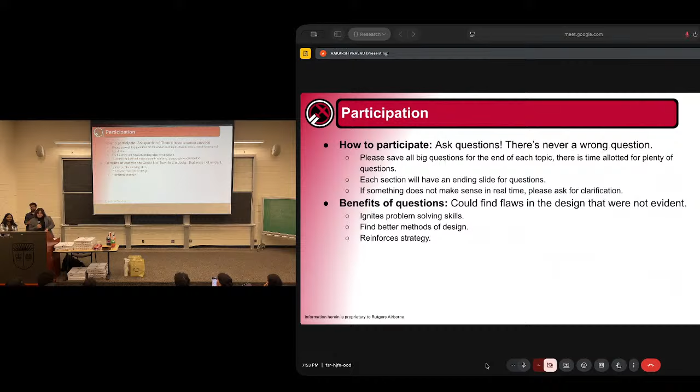Explain the actual organization as a whole. Hello, so if you guys don't know me, my name is Mahadi, and I'm gonna go over how our team is organized, and then a bit about the documentation.

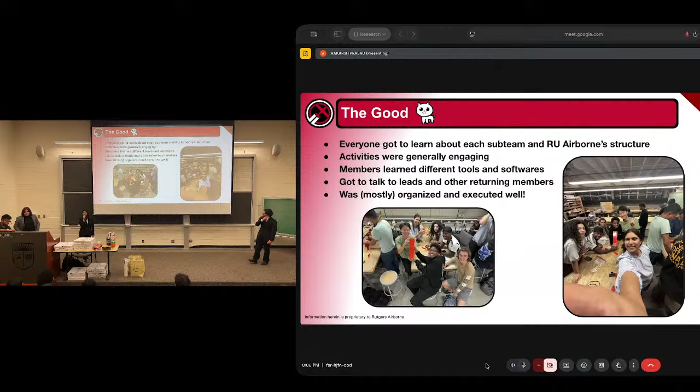And it was really nice to talk to all the leads, as well as new and current members. And it was mostly organized, and we're going to talk a bit more about that when we get to the improvements. So, some things that could be improved upon, or some things that are bad...

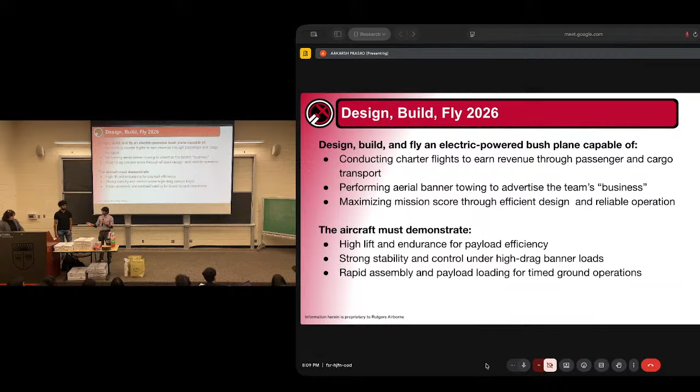So some general mission requirements: this year something newish that's been added is a rated aircraft cost, which is a variable dependent on wingspan, and it basically sets a maximum wingspan of 5 feet, but also sets a minimum wingspan of around 3 foot to maximize the score. And the score affects mainly the mission scoring and is vital to that mission scoring.

And then on top of that, we have the ground mission, which is the assembly and the ground demonstration. You have mission 1, which is no payload and basically a flight test. You have mission 2, which is the passenger and cargo mission, and mission 3, which is the banner towing mission. So to go more into specifics about each mission, let's have Joel start off.

So it all starts with the ground mission, which is basically an analysis or a test of how fast you can get your plane configured and ready for flight. So the ground mission takes place in, am I blocking the screen? The ground mission takes place in a 10-foot by 10-foot box. We'll call it the mission box.

And on the edge of this box, there's a start-finish line, because the ground crew member, who is the person configuring the plane, will be starting outside of the box, and then configuring the aircraft inside of the box. So before the timer starts, the pilot will be verifying the flight control surfaces just to make sure they're all active and working. Then the ground mission judge will start the timer.

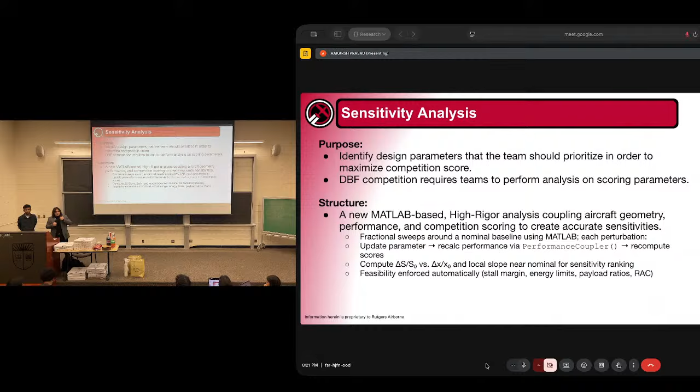So we take all that and iterate upon it multiple times until we have an actual diagram to explain to us engineers what we want to design around and how we want to design it. So what are we assuming and what are we figuring out?

Well, after analyzing and taking a lot of your input, so thank you to all of you who worked on sensitivity analysis and for your wonderful code, we were able to figure out, okay, we want to assume certain parts are constant. Let's say we assume we're at cruise velocity, or at a certain point we're turning, or at a certain point we're inclined.

You take all those concepts, and then you vary each of the little parts of those performance equations. Battery capacity is the toughest one, which propulsion was able to crack, so proud of you guys for that one. Bank angle, which determines basically how small a turn can we physically take. Do we want to take a nice, long, gentle turn, or do we want to take a nice, fast, quick turn? Which you guys might have an intuition on, and that intuition will be proven mathematically.

Then we also have wing area. How much lifting area do we want? Do we want to maximize lifting area? But if you have a lot of lifting area, a lot of wing, you may have a lot of induced drag, or some other caveats attached to that. Then you have wingspan. Wingspan matters this year in the sense that we can't just maximize it; our score is attached to minimizing it. If you minimize the wingspan, you will in theory get more score. We'll prove that mathematically as well.

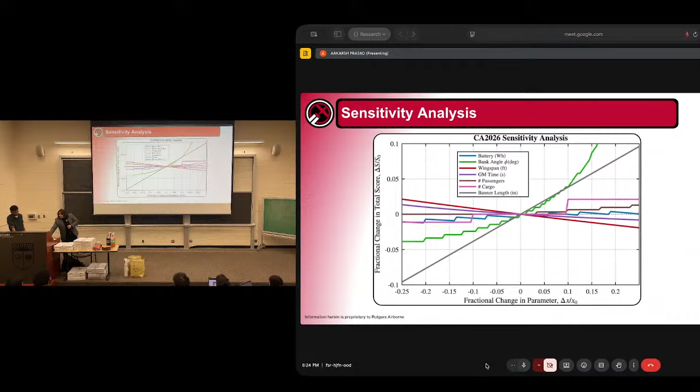So, what are the primary conclusions? Make a hell of a long banner is one of them. The second one is make a super maneuverable aircraft, more maneuverable than you've ever designed before. Try to minimize the wingspan. How do you minimize a wingspan and make it more maneuverable without introducing very unstable effects for the vehicle? How about cargo? You're going to increase it so much, you have to tow a ton of cargo.

And remember, there's a ratio where you need at minimum 3 passengers per cargo. So if you have a lot of cargo, you're going to have 3 times as many passengers minimally. So all those things now tell us, along with trying to put the cargo and passengers in on the ground, we should try to assemble it into the vehicle.

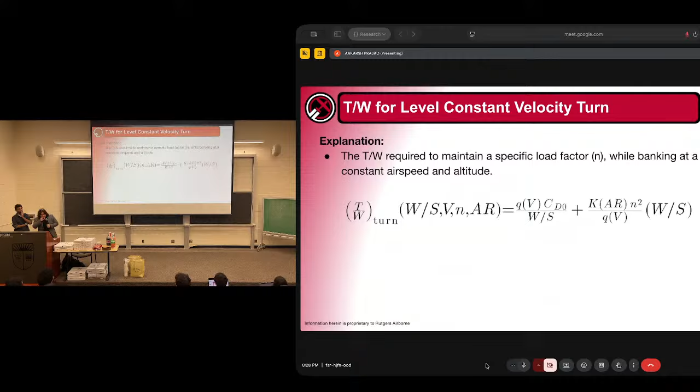The acceleration inward that causes an object to go into rotation. So if you have a high enough load factor, which means a high enough bank angle, you can relate it to the wing loading and different parts of the aircraft, such as the actual velocity of the vehicle, the drag of the vehicle, and other parts like the dynamic pressure and the aspect ratio. So you can create a relationship for the actual load factor while banking and turning the vehicle.

But it made it easier to fly, a little bit easier. It allowed us to be able to control the vehicle much more smoothly in flight and figure out how we want to go about actually optimizing the mission. So that's an important constraint. How easy is it to fly?

Then you have the thrust to weight ratio for a desired cruise speed, which is almost exactly like the load factor version, except without the n squared. And we can talk about the aerodynamics of why that is, but I won't go too deeply into that. Just know that this relationship relates the wing loading directly to thrust to weight, and through that to velocity.

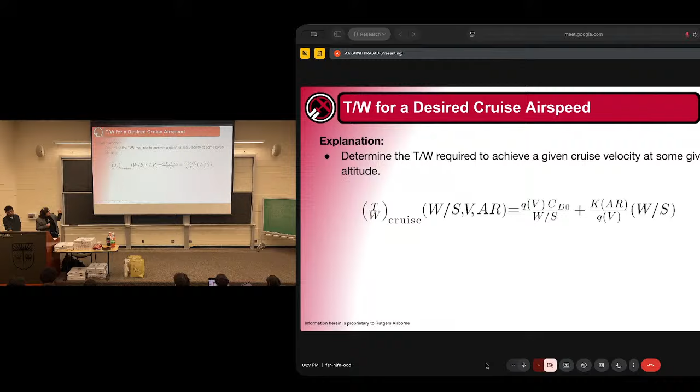So this is the part that kind of tripped me up for a bit, and still trips me up. In fact, it trips Professor DeMora up, and he's the aerodynamics guy here at Rutgers. So it trips him up, and it trips up Baru, and even Knight, and pretty much every professor. Then you know we're kind of cooked.

So how do we actually determine the big banner that's super long? We want to make it super long. How do we actually figure out what kind of effect that has on the constraint? Because obviously that has a constraint on the vehicle. So let's say this banner, or think of a flag really, like a flag on a pole. It flutters about, back and forth. What if that fluttering was like a sine wave?

So I talked to Professor DeMora, and he said, well, we could force it into a sinusoidal motion, and we'll create a relationship for that. So through a bit of math, really cool math, so for my aerodynamics people, I hope you get to experiment with this at some point in the future because I'm really excited by it. We developed a relationship that determines how much the banner will oscillate, and from that, determine the actual average drag from that banner. And when you actually put it into a graph, it looks something like this.

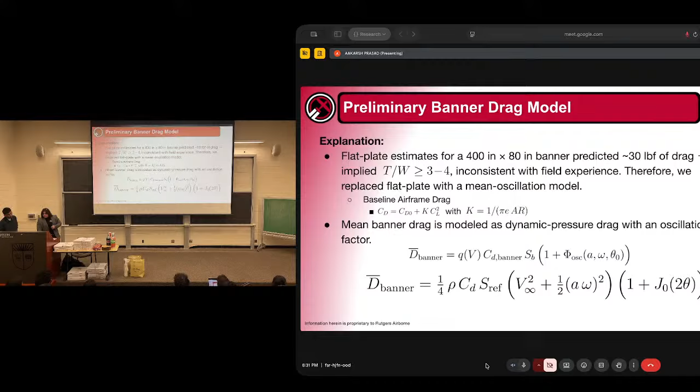Now, is it completely accurate? No. But it's better than what we call a flat plate approximation, which basically says if I took a really big old plate and put it at what we call angle of attack, or the angle between it and the air it's moving through, we'll then see that the drag looks like 30 pounds, which we know is not true because USC did it with like a 30-foot long banner, and they did not experience that much drag. So we have to create something more accurate to determine that.

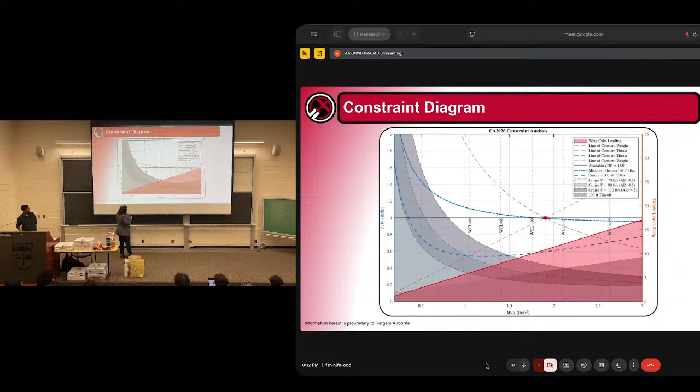So, taking those relationships, we pick a point. And this point happens to be a thrust to weight ratio of 1 to 1, a wing loading of 1.9014 pounds per foot squared, and then a wing cube loading of around 10, which is

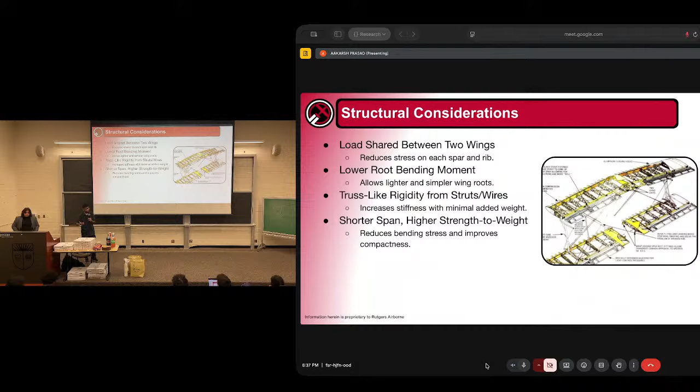So if we don't have a lot of moment, that means we won't have a lot of flutter, which I'll go into, and also structures we'll mention a bit later on. Usually for biplane wings, there are also struts, like rods connected from the top wing to the bottom wing, that help increase the structural stability of the aircraft. So aerostructures will go on there after this next slide.

All right, manufacturing considerations. This is, I'm pretty sure, the first time in airborne history that we will be manufacturing a biplane. It will have its complications, I will say. That's not something I'd say is going to come easy to us, right?

The best part of the manufacturing is that we have a bit more leeway to work with weight. The number of passengers we can add is completely up to us based on how we determine the CG of the aircraft. And we have more leeway because if we have two wings in the forward fuselage, then we can shift around the weight as much as we want.

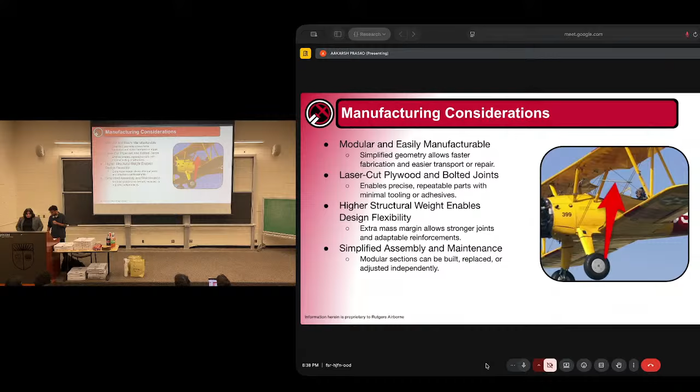Alright, next is aerodynamic consideration. This is kind of outside my specialty, but I'll try my best to explain it. From an aerodynamic perspective, the biplane helps us kind of cheat the system a bit. How does it let us cheat it though?

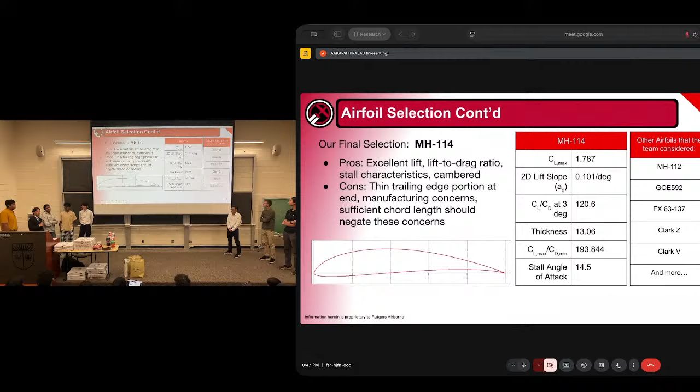Its stall characteristics, so basically how well can you rebound from a stall given that you do stall. And since it's cambered, it does produce a little bit of lift even at an angle of attack of 0 degrees, so that's good, especially when you're taking off. The only con is the trailing edge at the end, it might be too thin, however, with a long enough chord, it should be thick enough. Thickness is dependent on chord length, so the bigger your chord, the bigger your thickness.

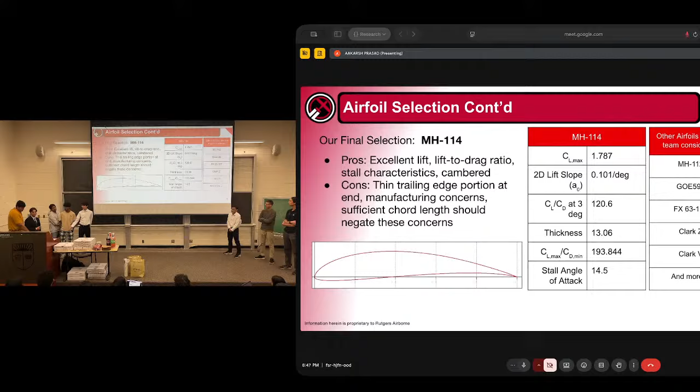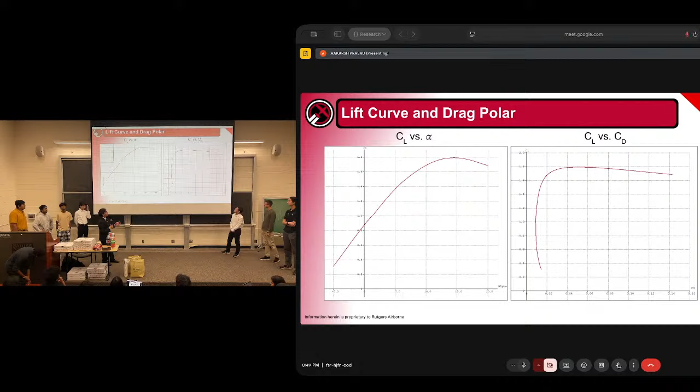Its maximum coefficient of lift is about 1.8. And the drag polar curve, that is also good. As you can see, we have really high coefficient of lift, and as you look on the x-axis, it's a fairly low coefficient of drag. Again, that's good, we want more lift, less drag. If you imagine a tangent line to that graph, you would have a slope of 0 right around the maximum coefficient of lift, and then it starts decreasing. So that kind of means that our drag forces are increasing while our lift is decreasing, which happens at our maximum angle of attack, about 14.5 degrees, which is good because we're not going to be flying at 14.5 degrees for a long time. We're mainly going to be flying around 3 degrees above the horizon.

And so as mentioned before, the aspect ratio and wing loading that we found to be optimal was 4 and 1.9. This is because of the low wingspan that we required. And because we basically know our takeoff weight is going to be 15 pounds, given that we want our aspect ratio to be 4 and wing loading to be 1.9, we're essentially locked into a pretty narrow range of what our wingspan and corresponding chord can be, which meant the amount of values we had to test was pretty limited, luckily. The analysis we used was XFLR5 with the quantitative decision matrix.

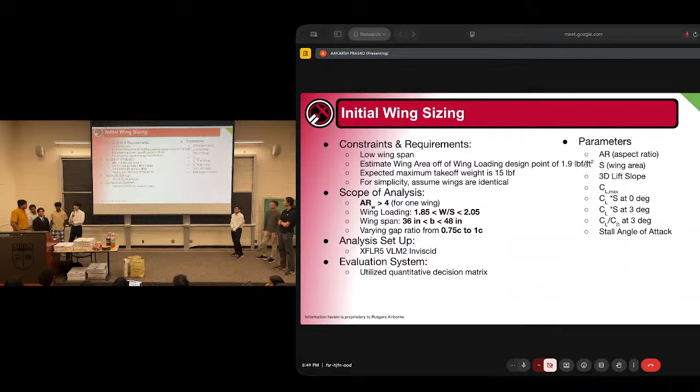And so the sizes that we found to be most optimal was an 11.9-inch cord length and a span of 48 inches, which gave us an aspect ratio of exactly 4, and a wing loading of almost exactly 1.9. And so even though our testing range for gap to chord was only 0.75 to 1, the gap to chord that was most dominant was actually smaller, at 0.625.

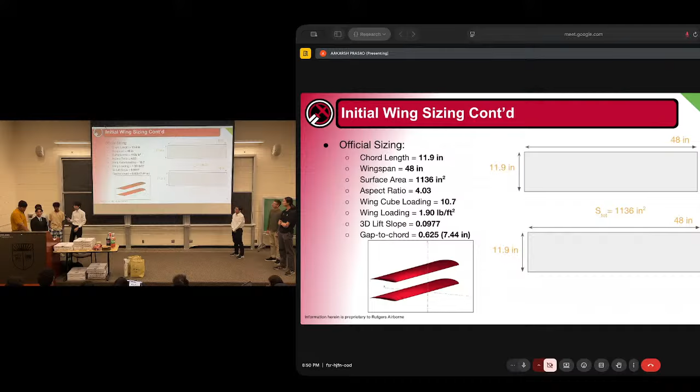So this is a wind tunnel test from NACA, showing the gap to chord ratio for a specific angle of attack, and then the stagger for angle of attack. As Federico said, we didn't really use any stagger. The lines, as you can see over here, are really close together, so there's not really much difference for the actual stall angle of attack. A higher gap to chord ratio decreases interference and improves lift.

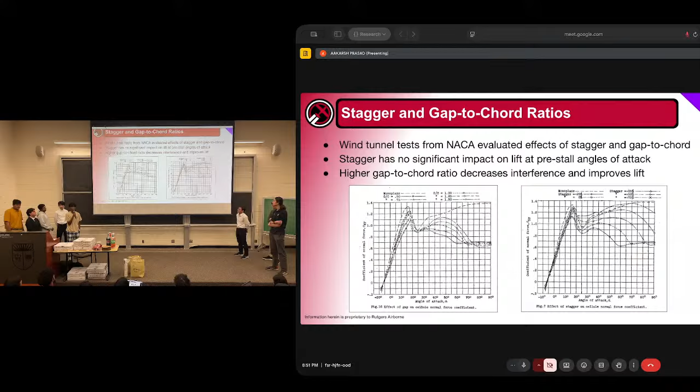One of the most important parts about the biplane design is the gap to chord ratio, which determines how much interference the wings have with each other. This is a graph I should start with Munk, the biplane goat, who introduces two efficiency factors based on either the geometric angle of attack or the camber of the airfoil. These efficiency factors give you a lift reduction or penalty. If you look at the graph, B naught, the top line, is higher, meaning it's more efficient than B, which is lower and takes more of a lift penalty. So highly cambered is good.

The gap to chord ratio, of course, we would like it to be 1 or a little bit higher than 1 to minimize the interference of the two wings so that we don't take too much of a lift penalty. But because having a high gap to chord ratio means a big fuselage, that's not good for aerostructures, so we have to compromise. We take something pretty small, a gap to chord of 62.5%, for fuselage and structure reasons. If you're interested in the exact numbers, B naught is 0.88, and B is 0.77.

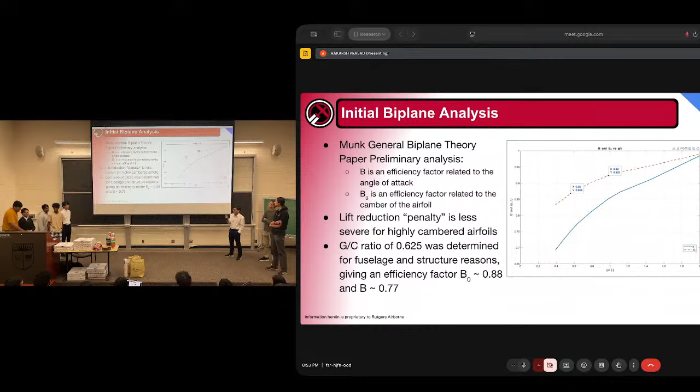When doing the initial tail sizing, a few parameters we take into account are the aspect ratio as well as the tail volume ratio. For the aspect ratio, we want it small enough to reduce the risk of a tail stall, but also big enough so it can respond to any disturbances. For the horizontal tail, we're expecting a range of 3 to 5, and for the vertical tail, an aspect ratio between 0.9 and 2.

For the tail volume ratio, the horizontal tail is about 0.4 to 0.7, and the vertical tail is 0.025 to 0.075. Using our formulas, we vary parameters such as the moment arm, the area of the horizontal or vertical tail, the wingspan of the aircraft, the geometric mean chord, and the area of the wing to get a value within the ranges we're looking for.

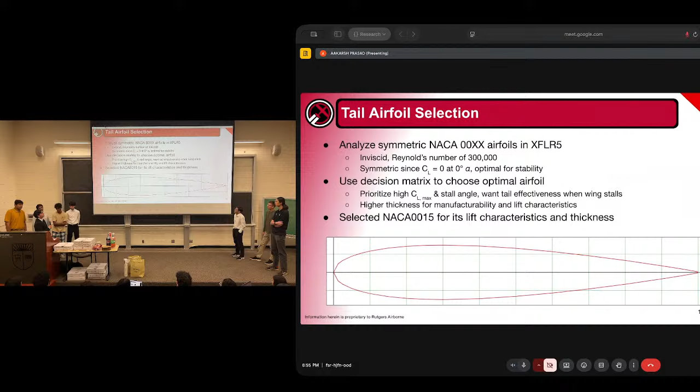The tail is at some distance from the wing, call that the moment arm. These equations are from Snorri. What they do is minimize the wetted area of the tail surfaces and fuselage, which gives us less drag, the optimal or least drag.

We got a sheet and altered the volume ratios. We expect our fuselage to have a diameter of like 8, and that's what the sheet spit out. It was different for the horizontal and vertical tail, but not by much, so for simplicity's sake, we just make them the same. That's a pretty typical thing to do.

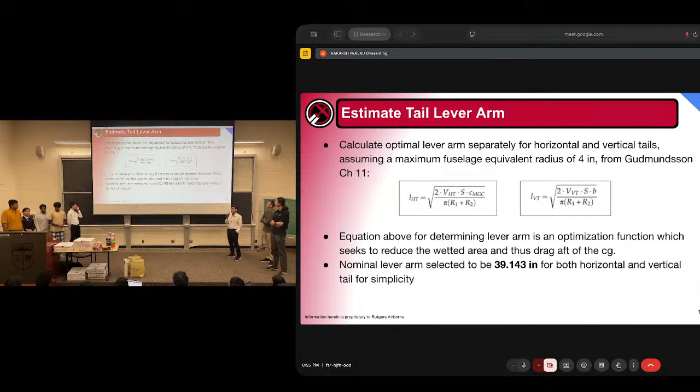With the spreadsheet that Federico made, which has a bunch of equations from Snorri like the one from the previous slide, we pick some parameters that the spreadsheet spits out, put it into XFLR5, make a plane, and estimate Cm naught, Cm alpha, and the trim angle.

After iterating through tons of values for the area, span, and chord, this is what we got: we ended up with a span of about 28 inches, a chord of about 7 inches, and an area of about 200 inches squared.

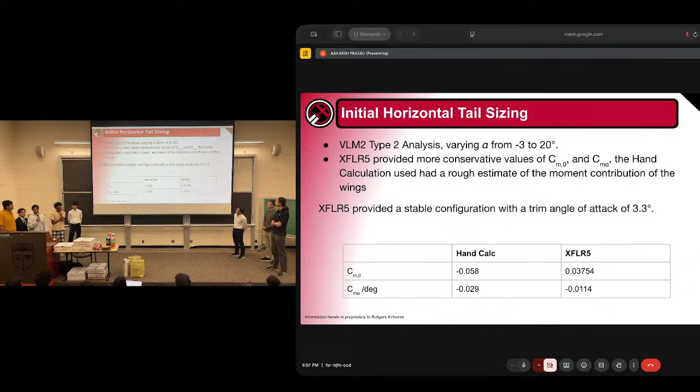Alright, this is the fun one. So we're flying a banner, so if there are crosswinds on the banner, that's going to make a lot of unfavorable yaw moments. So we do need a very good vertical tail. It is the utmost priority of the aircraft, in my opinion, a very strong opinion.

And the criteria for that is we want the yaw moment derivative, or the slope with respect to beta, to be greater than 0, and the roll moment with respect to beta to be less than 0. And that is the criteria for lateral stability.

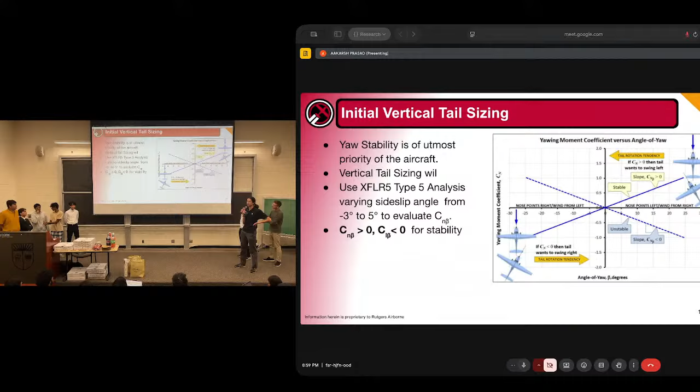values. So you see the table, that one is less than the hand calculation. And our final dimensions for the vertical tail: we found an aspect ratio of 1.9, an area of 95 inches squared, and a tail volume ratio on the higher end of 0.068. And I also calculated the roll derivative with respect to beta; it's much smaller than the yaw derivative.

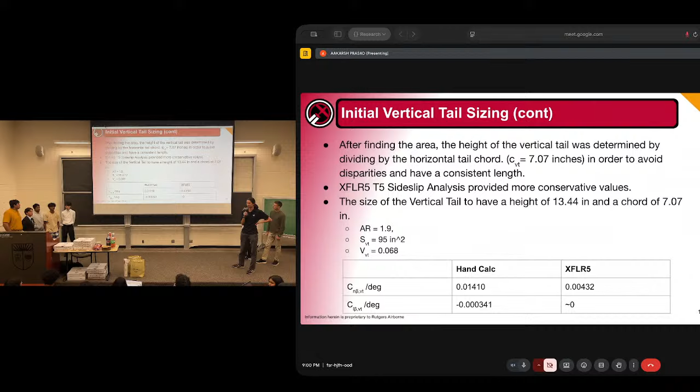All right, so the destabilizing parts of the yaw moments come from the wing and the fuselage. It is given by that equation there. You have to go to a lot of graphs to try to get a value, and the calculated one that we got was on the order of 10 to the negative 4. So this is 2 orders of magnitude less than the Cn beta that our vertical tail provides, which says it's stable. I hope it's going to be stable.

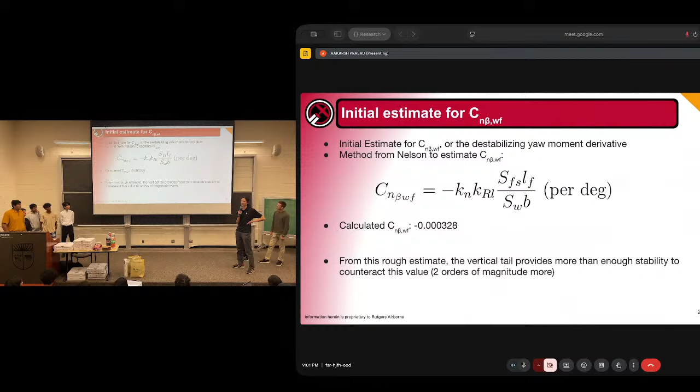And for the flaps, we also made them the same size, and they will be used on the inner portion of the wing from 20% to 50% of the half wingspan.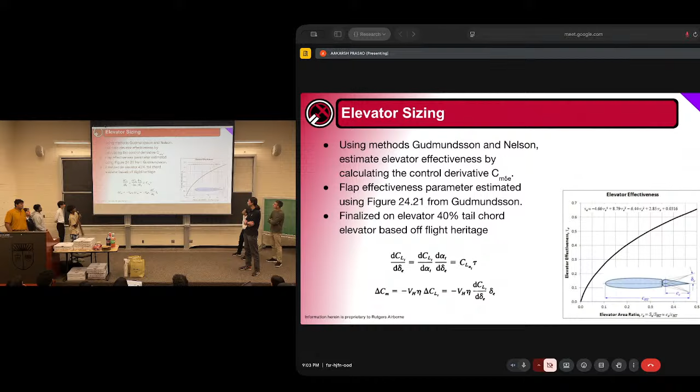So for elevator sizing, we used the Gudmundsson and Nelson methods to estimate the elevator effectiveness, and we got the control derivative. From the figure over there, we got a flap effectiveness parameter, and we decided on a 40% tail chord elevator based off our previous flights. The graph shows the elevator effectiveness for the elevator area ratio. So the elevator effectiveness that we chose was 40%, which is 0.4, respectively 0.2 for the elevator area ratio.

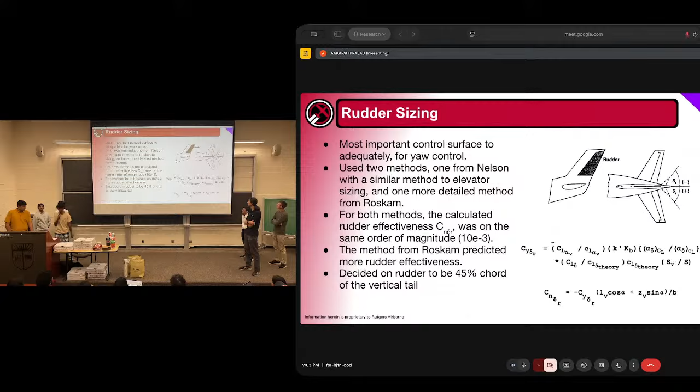For yaw, for aileron, you can calculate adverse yaw, and we found it to be much less. It's less than the yaw moment when you deflect your rudder 10 degrees. Adverse yaw is when you deflect your ailerons, you get unfavorable yaw.

And now for pitch, only the elevator. When you deflect your elevator, that changes only pitch, and you have a delta CM of much larger value than what you get if you deflect your lateral control surfaces.

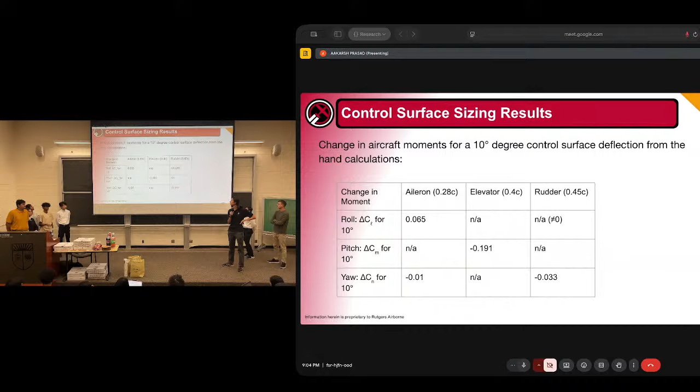So some future projects we're having: we're gonna investigate maybe having a taper ratio or just not a perfectly rectangular planform for better wing. We want to delve further into the biplane configuration, and this may include redesigning or resizing. It depends on how well we fly and how well the first prototype goes. We're going to determine our CG envelope and mass properties once that gets determined.

We're going to start AVL, which is, in my opinion, a more sophisticated software, and an even more sophisticated in-house software that we have is CFDS, made by Anastasia and Sharish. We hope to use that as well in the future when we are analyzing the flight dynamics of the aircraft.

All right, questions? Yeah. When we were at the NEAT fair, we saw various tail configurations where the rudder was the biggest surface of the aircraft, and most of the V-stab was a rudder. Did you guys do any analyses on that? And what were your thoughts?

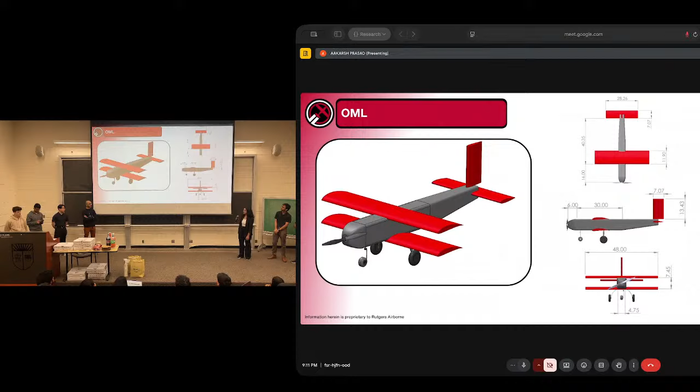Yeah, so for the aircraft, as stated before, we're using the airfoil MH114, which will have a span of 48 inches and a chord of 11.9 inches. And we're using the biplane wing configuration, which will allow for minimization of RSC, which we know is a very important factor for scoring.

Okay, so for this year, we're going with a conventional aft fuselage as opposed to a boom tail that we've done last year. Both our H-stab and V-stab use the same airfoil, which is the NACA 0015 airfoil, and it is a symmetrical airfoil. Our horizontal tail has a span of 28.26 inches and a chord of 7.07 inches, and our vertical stabilizer has a span of 13.4 inches and the same chord of 7.07 inches.

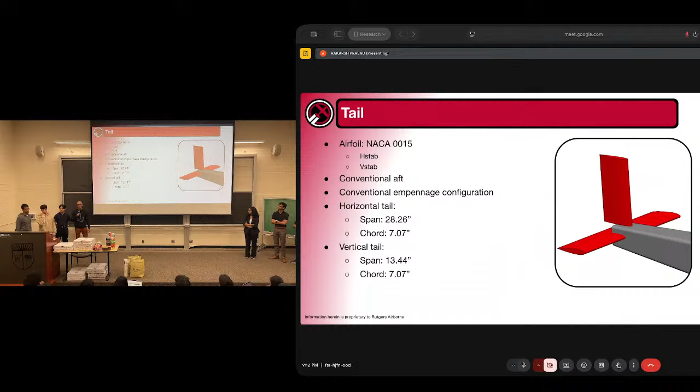So for wing to fuselage attachment, since we have a single wing at the top, we just kind of screwed it in and attached a carbon fiber spar through it to make sure nothing happens during flight. For the bottom wing, it's going to be split, so it's going to be like one of our previous airplanes, which was Susan, where we separately bolted each of them and had a carbon fiber, so it's a pretty similar design of integrating it, but it's each different.

And as Parks has mentioned, since we are doing a biplane, we also need to account for bracing. And what bracing basically does is just add stability to your plane. And this can either be in the form of solid rigid struts or also wires. Wires only act in tension, while the struts, since they are rigid, will act in both compression and tension. When a wire, quote unquote, compresses, it just bends a little bit. Yeah.

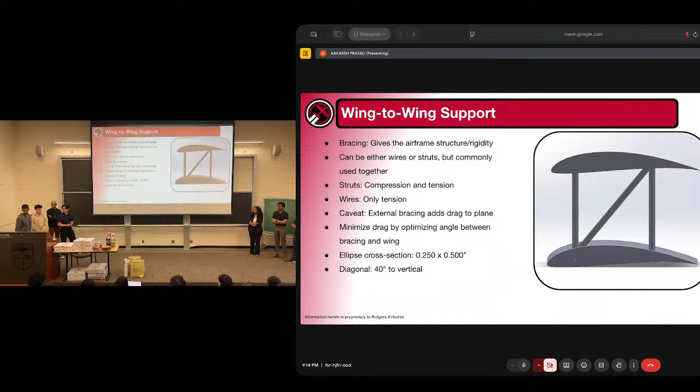Yeah. All right. Let's talk about the nose cone. First, before I go into this, I want to mention that some of these measurements are a bit tentative, and we're working on it essentially. But for now, I can tell you what we have. We're gonna 3D print this cover with, I believe, a 6.25 by 7.45 inch base, and that has a 0.75 inch corner fillet. And the propeller dimensions: it's a 20 inch by 12 inch propeller.

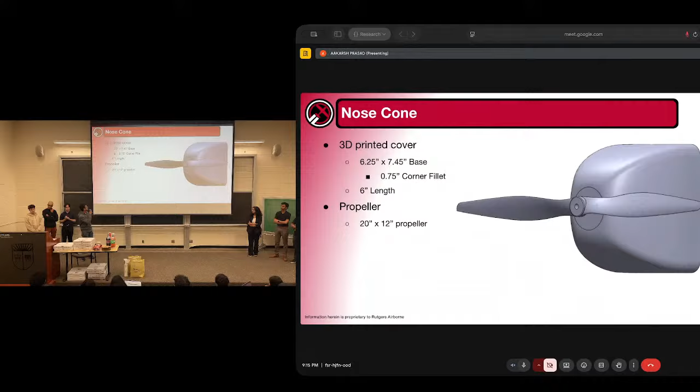So our landing gear configuration for this year is a tricycle landing gear. As you mentioned, we do have a lot of experience with that in the past, and it has worked out well for us. So the clearance between the bottom of the fuselage and the wheel axle is 5.5 inches, so we shouldn't have any issues with prop clearance, and all of our wheels have a diameter of 3 inches.

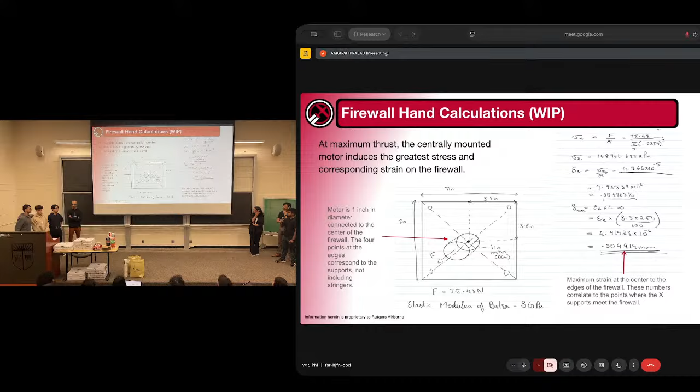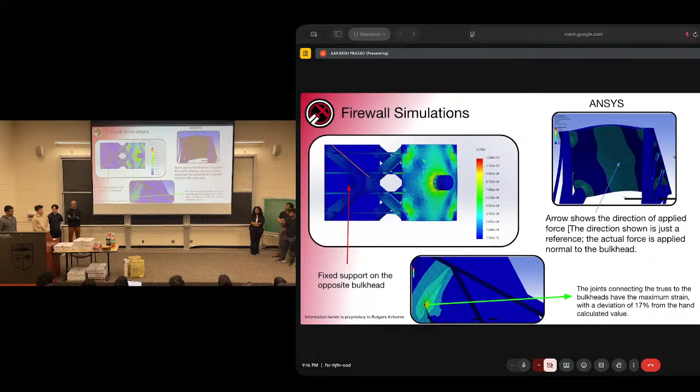So we get about 17% deviation. And I think I got the number wrong for the distance. After that correction, I think it should be spot on. Any questions?

Nice work to everyone for all their work. I love the OML. I actually did it in a little 3D augmented reality simulation recently, so it's pretty gnarly. Looks amazing. So good job to you guys and all your hard work recently. So, coming up now, in order to make this mission viable, I'm proud to introduce the mission team up to the stage. Come on, folks, come on.

Alright, just introduce yourselves. My name is Joel. Hi, I'm Jake. My name's Tom. Hi, I'm Lorena. I'm Omer. I'm Zach. I'm Ariel.

Thanks, Ariel. So, the mission team, what are we tasked with this year? There are three components that we have to think about. One is the banner deployment. How are we going to deploy this banner? How are we going to stow it? How are we going to release it? The second is the passengers. How are we going to constrain the passengers in all directions, all degrees of freedom? And the third is the cargo. How are we going to restrain the cargo in all degrees of freedom as well? So, next slide.

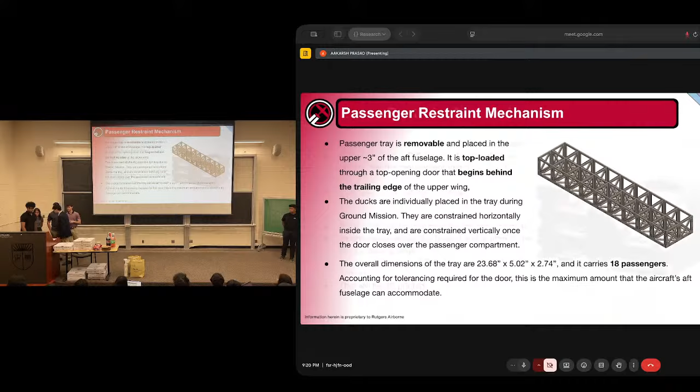Alright, so our cargo restraint mechanism will consist of a 2-piece modular rack. The bottom piece there is our base plate. That's going to be able to move separately from our top piece, which consists of 2 separate columns, each able to hold 3 pucks that stack on top of each other. This rack system will allow us to load and unload cargo very quickly and efficiently during our ground mission. And we chose 6 pucks here as per the requirements from the rules, since we have 18 passengers.

So there are some features here: we have some hinge slots for the easiest removal from the airplane. We have two on the top, just to take the top part out, and two on the bottom as well, so you can take the whole thing. This is going to be 3D printed for ease of manufacturing, or it can go with wood, and it's going to be a little under 8 inches long, 4.5 inches wide, and 4 inches tall. And the next slide here shows how it's going to work.

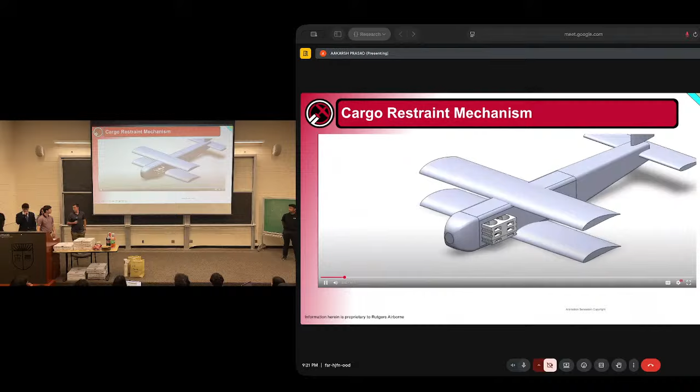First of all, a round of applause for this amazing family. Thank you.

Okay, so this is our trade study for our banner deployment mechanism. We came up with 3 different configurations: one parallel to the length of the fuselage with a clamping mechanism, another parallel to the wingspan with a similar clamping mechanism, and the banner folded under the fuselage in a box with no leading edge. Our metrics were manufacturability, ease of installation for ground mission, mission 1 and 2 drag, mission 3 drag, movement restricting capability, weight, leading edge integration, and banner dimension constraint.

So I think our main constraint for this trade study was the banner dimension constraint, because our first option was not feasible. It constrains our banner length, and we want as big of a banner as possible, so we want a configuration that can go with any banner length possible. So our second option here fit that the best.

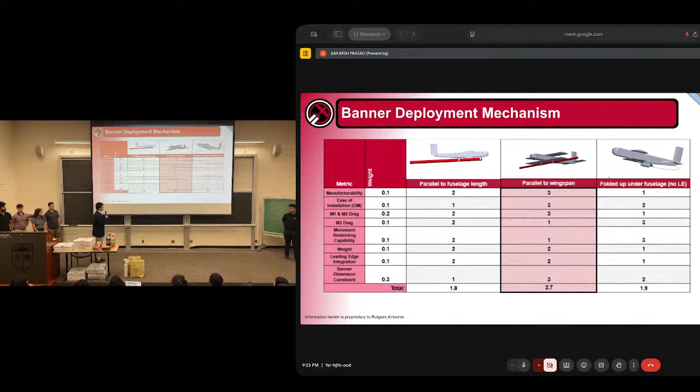Overall, in terms of why this banner deployment mechanism is the best mechanism, I would like to further go into how this works and what kind of mass we're dealing with in flight. So, you guys heard about it, the banner is going to be really long. If you want to go at maximum dimensions, the banner is expected to be around 400 inches, which is around 33 feet. With aspect ratio of 5, this banner is 80 inches, or maximum length, which is about 6'8".

So sometimes numbers might not be enough to visualize something. If you want to visualize how big a 6'8" banner is, our tallest team member is Federico, he's about 6'5". So if you put the banner right next to him vertically, it's 3 inches taller than him. If you want a comparison when you're leaving or getting food, you can stand next to him and see how tall he is. So when you're flying with a mini NBA player on your plane, mounted on your axle, there's a lot of problems that can come up. So you need to be really careful, even carrying it, forget deploying.

So how do we carry this? This design is actually kind of an old CAD design. What we're trying to go through right now is a more direct body connection to the banner, because we don't want to interfere with the landing gear due to the thickness and the size of the banner and the instability it might cause during takeoff. We want to connect to the body with a more stable, sound structure.

After we connect to the body, the string system is expected to be connected at the center of mass on the horizontal component. The vertical, we haven't figured that out yet, but we want to connect it to the center of mass, so when you release the banner mid-flight, we have as little instability as possible, since there's no torque arm because it's connected to the center of mass. That will help our stability, and then we're most likely going to add a counterweight on one of the edges to make sure the banner flies vertical through the entire flight.

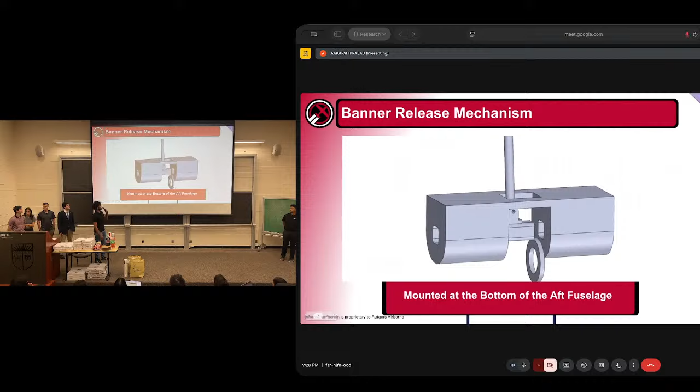So our dearest Jake made a great animation to illustrate this. As we can see, the pin linearly actuates so that the free end of the banner, which has a loop, can fall out. Then we activate it again, and now it's secure in all directions.

So for the animation, you guys know what to do. Round of applause.

Okay, so next, banner material. What are we going to make our banner out of? We did a trade study for this, and it was actually pretty interesting. We conducted it in a way that we haven't done before. Usually in our trade studies, we rank our options 1 through 6 in a sort of qualitative analysis, but here, one of our members had a great idea of normalizing the scores and ranking them quantitatively instead.

To explain what I mean, let's look at the first parameter, cost, for these different materials. The highest ranking score of 10 was woven propylene, and to get the full area of the banner we're trying to make, the cost would be about $24. On the other hand, the 1/8 inch LDPE, to acquire that much area, would be upwards of $550, so obviously we're not trying to do that. If we did a normal trade study, the point difference between $24 and $550+ would only be 5 points, whereas here, the woven propylene is rightfully scored 10 times as high as the 1/8 inch LDPE.

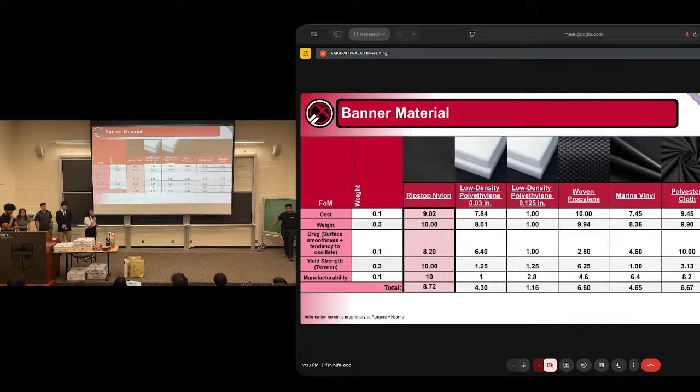I'd like to preface this: for all of our calculations in terms of quantitative values, we were able to use multiple constants, such as cost and weight, using estimated values found from constraint analysis and banner material research. And during banner material research, I will pass the microphone over to Zach to go over the initial banner research.

Thank you, Ariel. So where did all of these numbers come from? We started with looking at a similar competition. A few of us are now familiar that DBF 2020 had a very similar premise with a banner towing component, so we started looking there. We analyzed some of the top 3 reports to see what materials those teams considered, and looked into what materials actual banners on some of those planes, like the Rutgers athletics planes out there on football game days, use.

Some qualities we wanted to assess were cost, because we don't want to be spending upwards of $500, $600 on 1 square meter. Since we don't want our banner to tear very easily, we wanted to make sure our yield strength is very good. And for drag, since this isn't something we calculate heavily, this was more of an eyeball-it approach: is this a rough looking material, is this something with a lot of gaps? All of these qualities were something we needed to consider in order to come up with these values you see here.

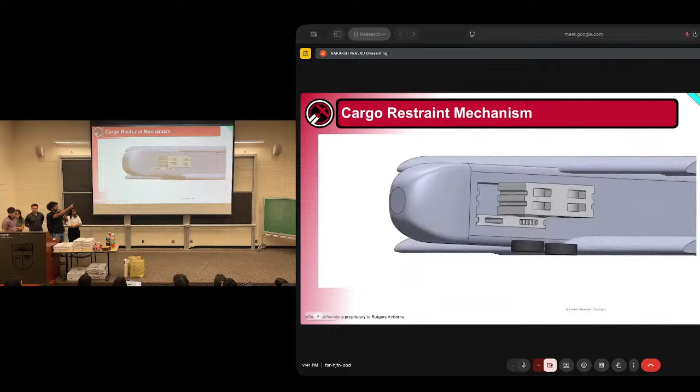Thank you. Right there, why would you need 2 different pieces for that? So when you pull out this piece, this is right now 2 trays. When you pull out both of them simultaneously and load the cargo in, it can't fall through that bottom floor because those weight saving cuts aren't enough for a puck to fit through. But when you only pull out the top tray, first to start the ground mission, you load in the pucks and they sit on the floor. Now when you remove it, it falls through the circular holes of the first tray. So when you only remove this top tray, you could very easily just unload and drop all the cargo out of the fuselage.

Does that make sense? Wouldn't that get jammed pretty easily, the pucks? Well, if it's toleranced correctly, one, and then two, they won't drop out until the hole is fully outside. Yeah, like it could happen. There's the hex on the bottom plate, so if a puck gets stuck in those hexes or something, it could happen. We'll look into that. We'll have to test it and see.

Maybe we'll sand it down. If it's smooth enough, it shouldn't be a problem. It would need to be big enough for the puck to get stuck on, but it doesn't have a uniform surface, it's a pretty smooth surface, so it shouldn't be full. And if anything gets stuck, I'm pretty sure we can manually push it down if it does get stuck.

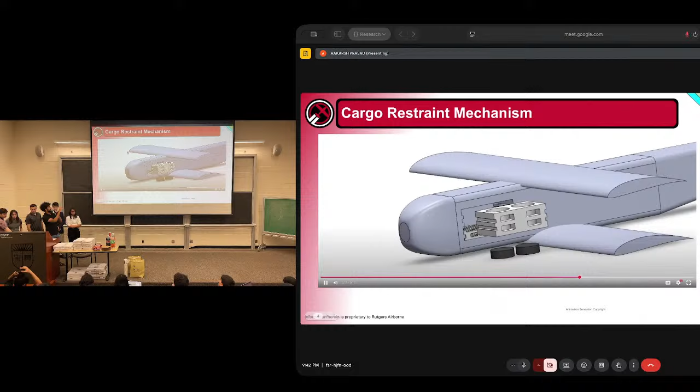I'd like to know, in the animation you're showing when loading, it looks like the part is a full cut through for the pucks. So my question is, how are they getting locked into place? The top tray is a full cut through, but the bottom tray isn't. It's a honeycomb structure, but the pucks can't fall through that bottom tray, so that's how they're held into place, at least vertically. Does that answer your question?

Do you load them from the top in case the bottom is blocked? Because there has to be a surface there holding them in. Yeah, you pull out both of the trays and then you load it in from the top. Okay, yeah, that answers my question.

Thank you. How do we make sure the banner is stiff when it's being held by the claws?

The banner's stiff, so it's not floppy on the end, like it won't slip off when it floats. Okay, it has a leading edge? Yeah, it's all attached to a carbon fiber leading edge. Will that leading edge just fall out of the sky, or will it be attached to the banner when it unfolds? It'll be attached to the banner. The leading edge is there for the banner's structural stability and the banner's aerodynamics.

So the banner needs it. Fly with leading edge, that's it. You don't want to fly without leading edge. Gotcha.

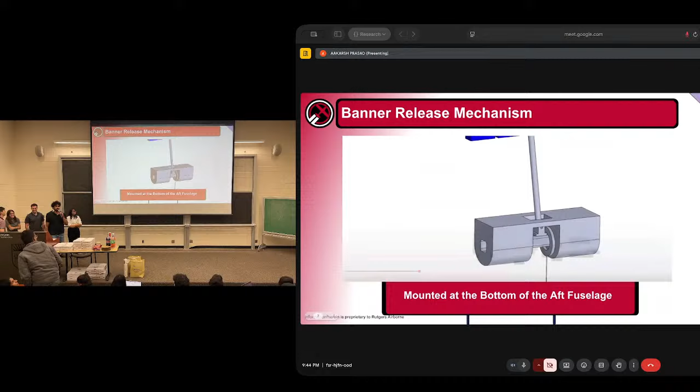Any other questions? What's up, Sean? I want to bring it back to the hockey puck thing. How are you going to make sure that when you're loading the hockey pucks, with six of them in there, the bottom plate doesn't accidentally fall out of your hands while you're loading it into the plane? It doesn't look like it attaches them all. Well, it wasn't in this OML model, but we'll have a stopper so you can't pull the bottom one completely out of the plane.

Is there anything stopping the pucks in the top tray from falling into the bottom tray? If we look here, this is the bottom tray, and it's pretty much a solid surface. These weight saving cuts are not big enough for a puck to fall through, so you can just think of this as one solid plate.

If you had a stack of pucks and then you put a puck on top, would it fall all the way down, or stop at the second floor? It's stacked on top of the other puck. There's no floor, it's just like Pringles in a can, stacked on top of each other. Yeah, like Pringles.

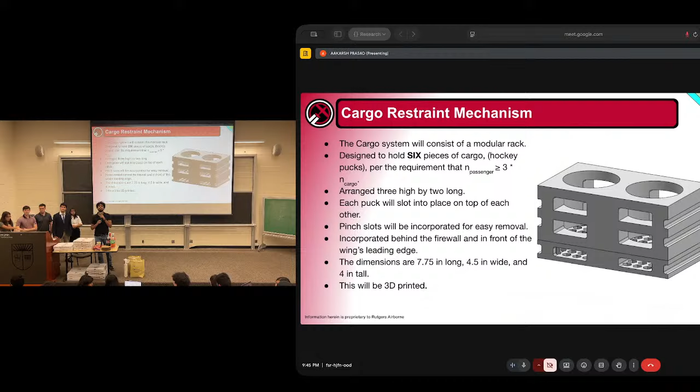From what I understand, the banner is launched along the x-axis? Say that again. The banner is going to be launched like this, started parallel to the wings, and then it's going to turn so it's parallel to the vertical stabilizer. Yeah, once it releases, there's a string that connects to the aft, so it'll be at the correct orientation once it releases.

Once we release it, we put counterweight only on one side, so one side of the banner is heavier and it goes into vertical orientation in midair. We release it from this configuration, but with counterweight pulling down it goes into vertical configuration, and the banner flies below the airplane, so the strings don't get into any of the control surfaces, like the wing or tail control surfaces. Okay.

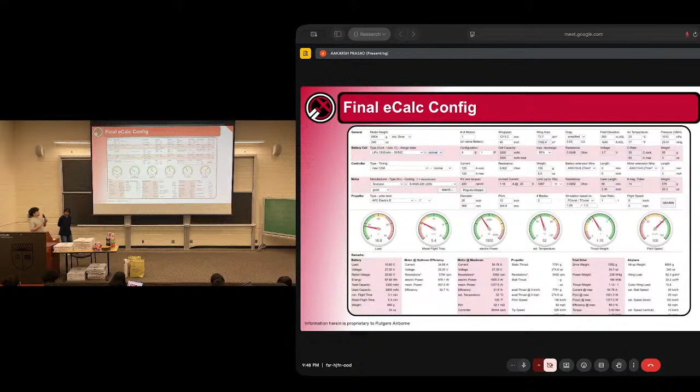It's a 20 by 12 inch propeller. So how did we deliver on each of the three constraints? First, we're using a 3300 milliamp hour battery, which is 97 watt hours, well under the 100 watt hour limit. That's a check. Limit 2, flight time of at least 5 minutes. We got 5.4, comfortably over this limit. Another check.

Limit 3, ideal thrust-to-weight ratio of 1.0. We got 1.15. For reference, here are some aircraft. Our CA-26 is 1.15, the Boeing 747 jumbo jet is only 0.27, and the F-35A fighter jet is 0.87. So with 1.15 we can probably do some pretty cool maneuvers. That's another check.

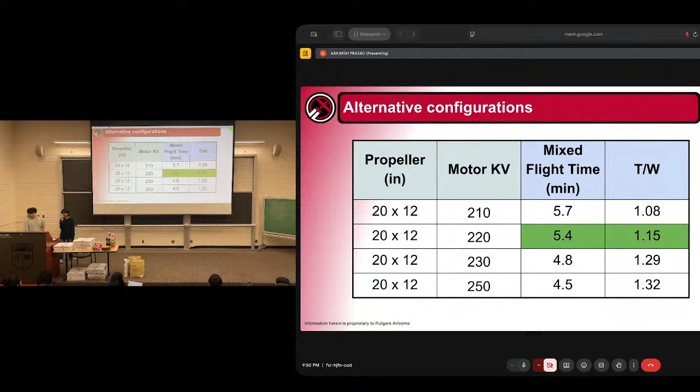We also did a lot of variations with our propellers. We have a 20 by 12 propeller and a bunch of different kV variations for our motor. The higher kV you have, the more thrust to weight you have, but you're compromising on flight time. So we went in the middle with the 220 kV motor, where we have a flight time above 5 minutes and the highest thrust to weight we can get.

Here are some graphs we made. This is another visual representation: generally, the higher the RPM, the higher your thrust and power are going to be. Here RPM also corresponds to the kV of your motor.

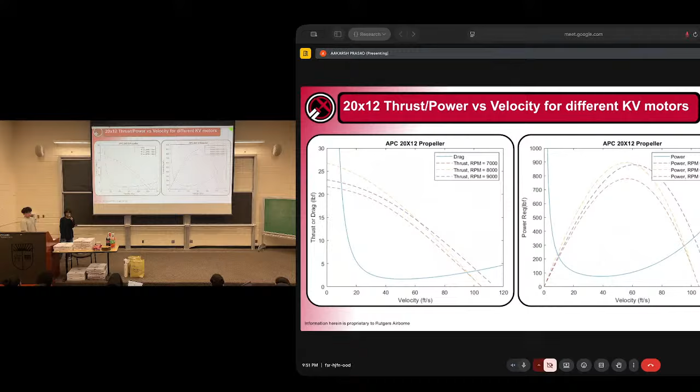So next, with our battery, we have a 3300 milliamp hour 8-cell battery, and we have a 120 ESC. And our motor is a 220 kV motor, and our propeller is 20 inches in diameter and 12 inch pitch. And the propeller spins.

Can I ask a question? All right, thank you very much, Propulsion. Thank you for the great work. I'm actually really happy about this propulsion configuration because there's going to be a lot of crazy maneuvers for this competition, and this is probably one of the most difficult competitions we have yet to perform in. So massive props to Propulsion. So thank you so much, guys.

All right, and now to actually have the aircraft fly, we first have to build it. So let me hand it off to manufacturing. Thank you, Anastasia. So, first off, we're going to give you guys a brief overview of our manufacturing process and how we're going to section off our time during the year.

So right now we're currently in phase 1, which consists of a lot of materials research. Because although we have some methods and materials that we're very familiar with, that we've used in previous years, that are very tried and true, we always want to look to improve, whether based on the specific missions that we have, or just generally for the club we have processes that we want to improve upon.

Then once we have an initial CAD, and we can start manufacturing an initial prototype, is when we move into phase 2. And that process sees us going through multiple iterations, fixing any potential issues that might arise, figuring out how good our aerodynamic calculations are, and then once we get very close to the competition, what I like to call crunch time, we begin phase 3, which is creating our final iteration that we're going to end up sending to the competition.

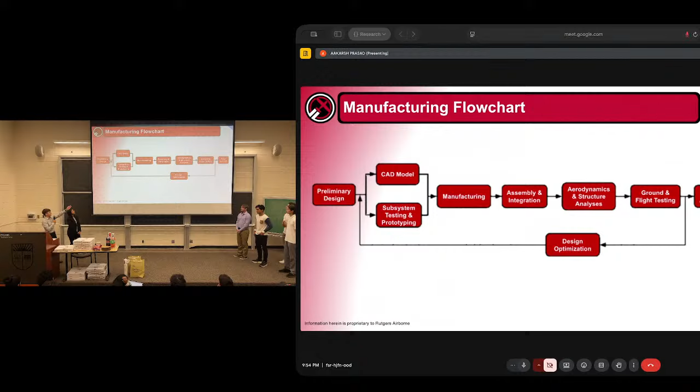Okay, so for phase one, we have a bunch of slides that will show you the research we've been conducting. So the first fiber that we've really been looking into working with was carbon fiber. But one of the biggest things that we have to worry about when working with carbon fiber is the safety concerns. When you're working with carbon fiber, as you may know, the fibers float around in the air, and these can cause a lot of irritation to your eyes, your skin, your lungs.

So we pretty much have to work with respiratory protectors, eye protection, gloves, and skin protection, just to avoid all of the different hazards when working with carbon fiber, because that could be a problem when you're doing all the different types of layups.

Alright, so the two main ways you can make the carbon fiber parts are, first, 3D printing, which is the easier way, because it's just more readily available. Or you can do a wet layup, which is a process where you lay down carbon fiber in a certain order, and you wet it using epoxy, and you have to make sure it's completely wet, because one of the downsides is that it bubbles, and the bubbles make it less strong. So you have to make sure there are no bubbles. And then it's got to sit for a long time to cure because of the epoxy. So the 3D printing is easier, but the wet layup is also a good alternative.

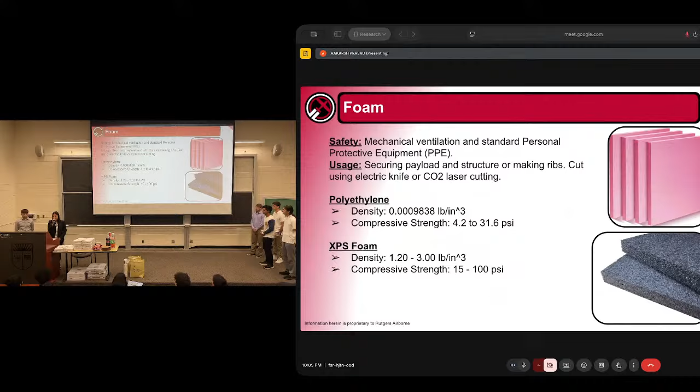Alright, this is going to be phase 2. We're going to be doing more trade studies, so you've seen plenty of trade studies in the previous slides. Basically we get figures of merit, we weigh those figures of merit, we list the options available, and then we do the scoring for them. We're going to be doing a lot of trade studies in the future for materials and different parts of the aircraft, but it's going to come out more once final configurations are released.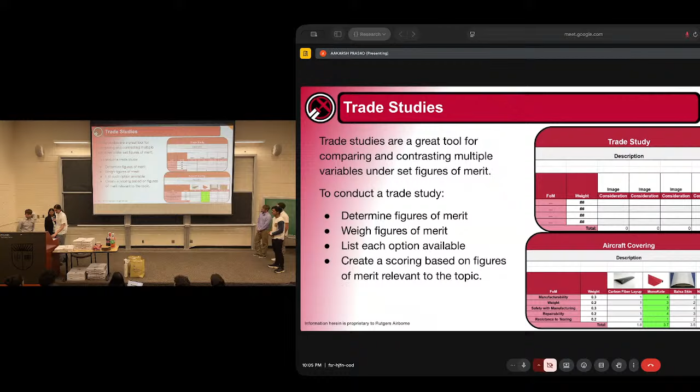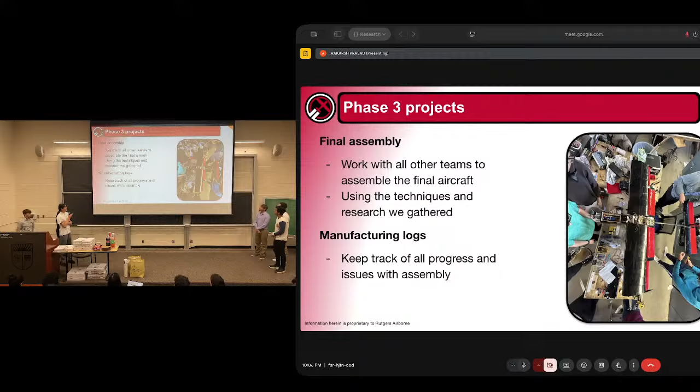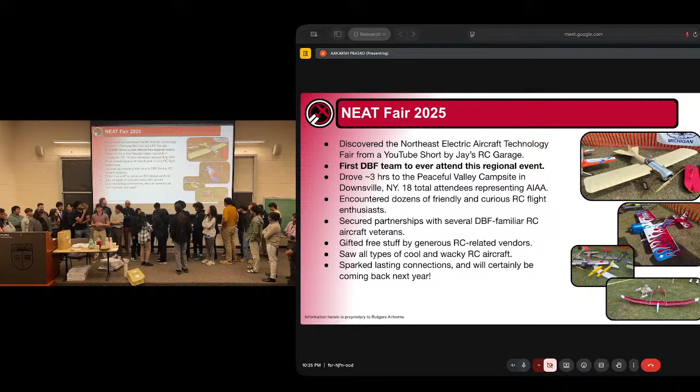So this guy went and built that in a scale RC model. He did RC scale wing warping to turn the plane, and the plane flew, and it was very cool and very insane. I also didn't include a picture, but there's a flying skateboard. Yeah, and Snoopy was the V-stab, and then it flew stably, so that was very, very cool.

Alright, just to wrap up this evening so we can sign off real quick. We got a couple things about sponsorships. I know that's the fruit of the labor for everyone here working. So, sponsorships. I don't want to yap about this. How about I let the guy who actually got the sponsorship? Adrian?